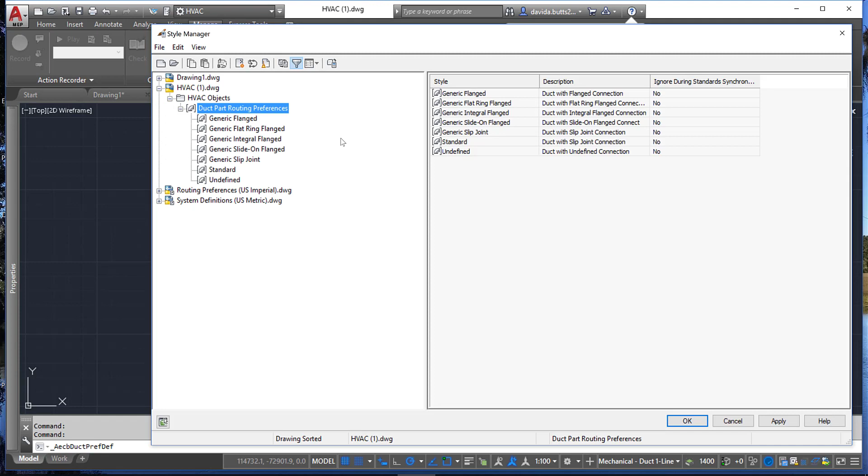If I go to Style Manager and I select this tool, I get these options: System Definitions and Routing Preferences. In order for you to draw any duct, you have to have routing preferences assigned. So if I want to use generic slip joint, if I go and look at what you have in your current drawing, you don't have any fittings assigned.

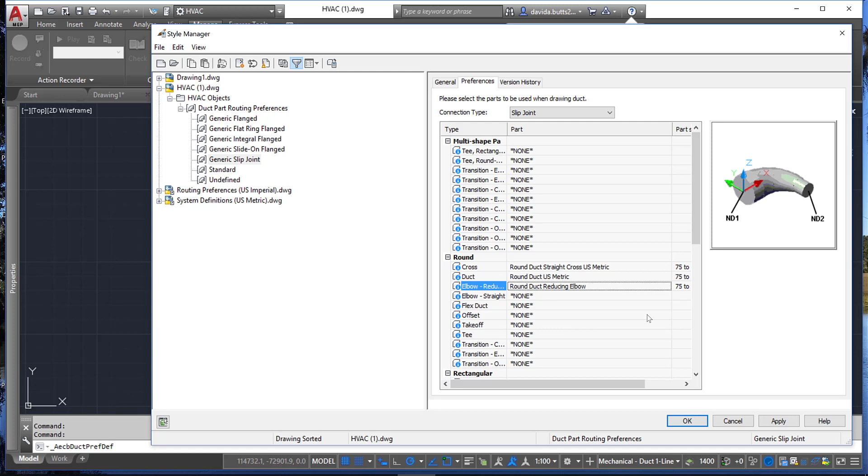So unless you go through and make these changes, like telling it what kind of a cross you want to use and what kind of a duct you're going to use, standard metric duct, and then you say what elbow you're going to use, you have to go through this step. If you don't do this, you're not going to get correct results. So I'm going to walk through all these and fix all these right here.

We're going to do a round duct, smooth radius, one diameter so it takes up a little less room. And then we're going to tell it what to use for flex. And again, you have to have this set. If you don't set any of this, you're not going to get routing to work correctly. We'll do a couple more things in here.

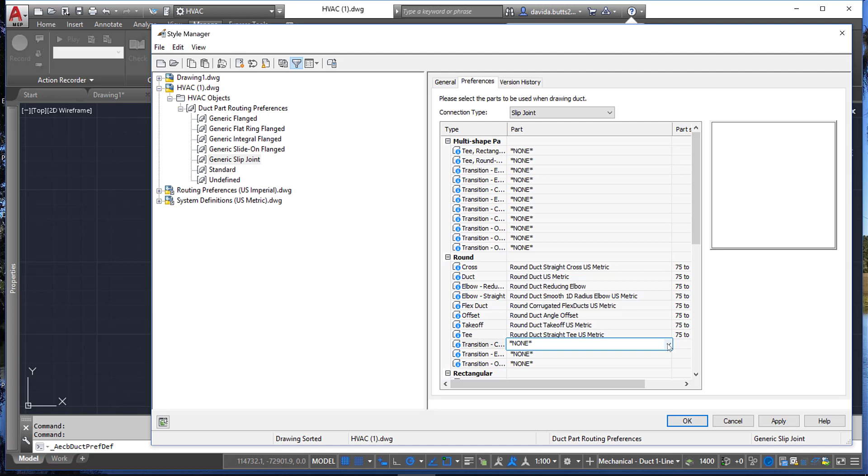And we'll do a little straight tee. And then we'll come over here and set you to use a round angled reducer. Do an eccentric reducer here. And one more transition with an offset. Okay, so we're just worried about drawing round duct at this point. Okay? So now what I'm going to do is click OK.

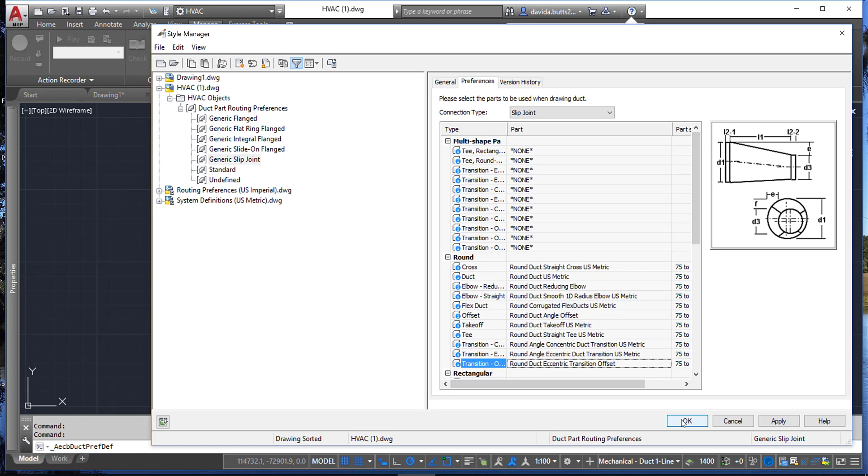Now, once I have that assigned, I can come back to the Style Manager and go to System Definitions. And I pick the system that I want to draw. Again, if you don't set this, your duct is not going to draw correctly. So I'm picking the slip joint now. Once that's assigned, then I can start drawing slip joint duct. I'm going to go ahead and click OK.

And one other note in here, you don't have to be in a single line view to draw this. In fact, I recommend that you don't work in a single line view. The best thing you can do is work in either MEP Design or MEP Basic 2-line. That way you can see the entire duct that you're modeling, because it doesn't matter. At any point you can come back and change the display back and forth between double line and single line, but work in double line so you can actually see what's going on.

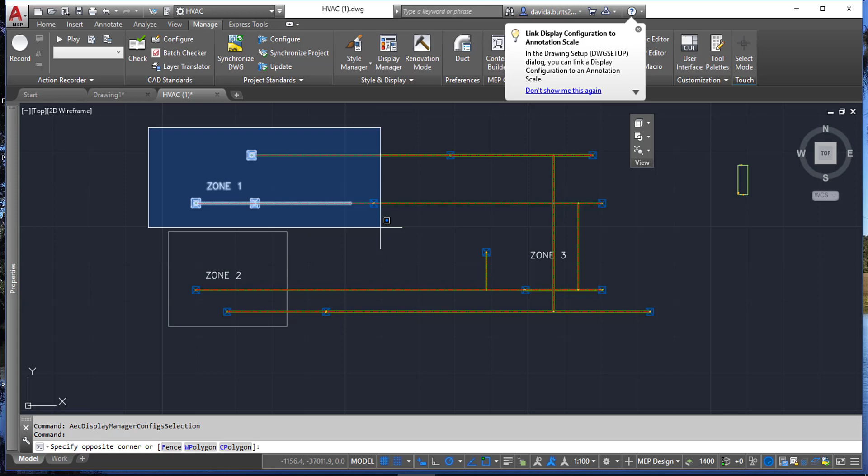Now I'm going to make a little change here. I'm going to go ahead and get rid of all the duct that you've drawn in your current drawing. I'm going to pick this and I'm going to go to Properties. And I'm going to say, okay, let's just look at the regular duct in this case. Actually, let's do this a better way. Let's pick this and just start deleting all these components that are just duct.

Get rid of that. We're going to keep these air terminals in here so you can see how this stuff is supposed to work. All right. Get rid of another set of vertical runs here because you don't need those. We're just going to drop out a bunch of sections here, get rid of that crazy looking flex that you had.

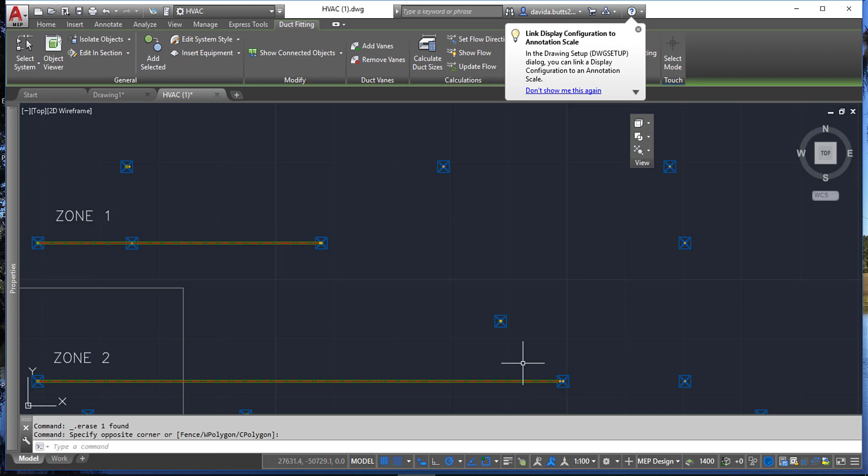All right, so once we get all this done, I'm going to make a couple of changes here real quick. The first thing you want to do is make sure you have everything at the same elevation. So if I'm connecting all this duct, what I want to do are these air terminals. I'm going to pick these. I'm going to come to Properties first. What you're looking for is to see what you need in here.

So I'm going to pick the multi-view part. That's what the air terminal is. What you're looking for is what elevation it is. So see how it says varies in here? That means that you have this stuff at different elevations. That's not going to happen in most projects. So you want to set them all to be the same elevation, like 4400.

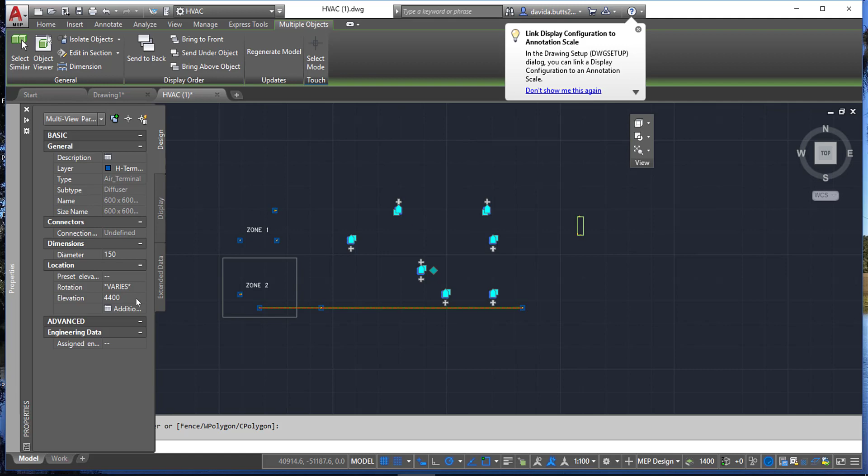Okay, that way everything is in here the way it needs to be, and you've got everything at the elevation that it can properly be assigned to. So if we take a look at this in 3D model to see where the stuff's not connected, you can see that we've got all these air terminals now that are at the same elevation and the same height.

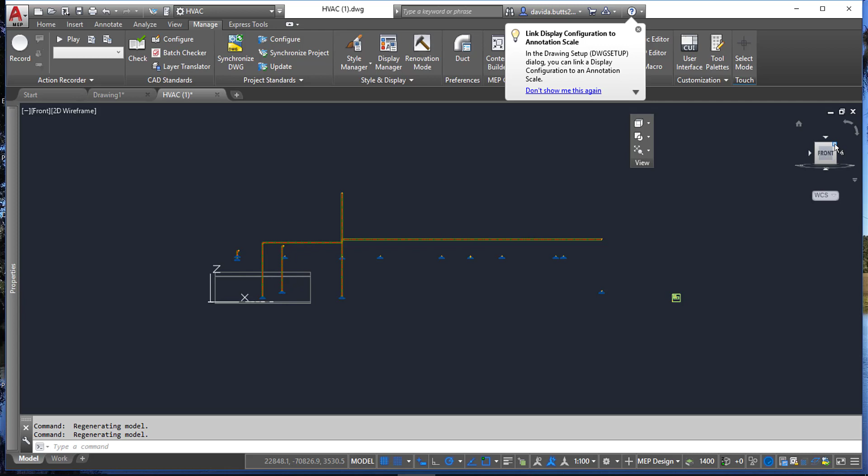This is what you really want to be looking for when you're looking at this to get ready to start routing duct. So again, take advantage of this view cube, spin around your view, and make sure that you've got the duct and fittings and stuff that you need in the drawing. All right, so let's go back over here to a top view again. Oops, sorry. Kind of rotated on me there. Let's go home. That's always the best thing to do. Come back to our top view.

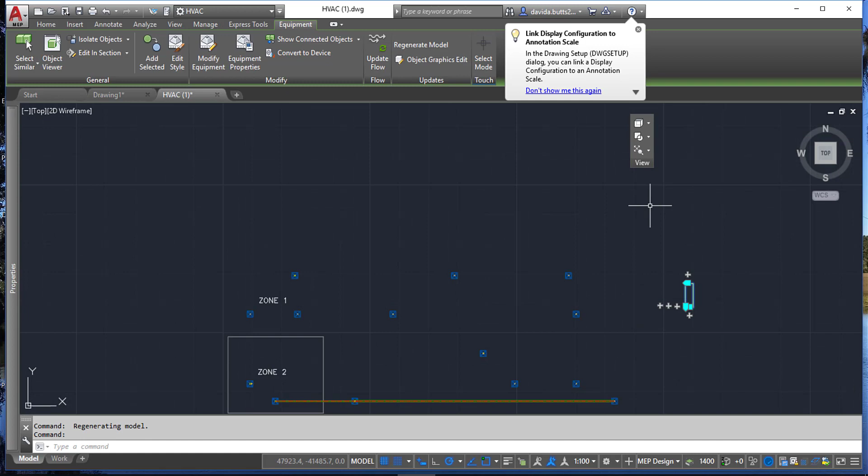All right, so you've got over here, you have a piece of equipment that's your source. This is what's providing the air to it. So in this particular case, this is an air handling unit, all right? And normally you'd want to draw the duct to this, but that's all right. We're not going to do that right now. What we're going to do is simply draw some duct out here. So I'm going to start by drawing a main duct.

So I go to Home, Duct, I pick the command, and I come over here to Properties. So the first thing I want to do is check the system that I'm working with. If you don't set this, you're not going to get the right duct routing. So I'm going to pick SA for supply air. Then I'm going to look at my routing preference. Notice that it picked up generic slip joint because that's the one we had assigned to the system definition. So again, you got to check these two settings here to make sure it routes correctly.

Now we know the air terminals are at 4,400. So what I want to do is set an elevation above it, just like you did before. And I'm going to set this up at, let's say, 5,800, just to give it some serious elevation in here. Then I'm going to come and I'm going to check the size of the terminal that I'm working with. So I can set the width and the height. In this case, I don't want to do generic. I actually want to do round. So I want to make sure that I'm using that slip joint.

So I'm going to start with a heavier diameter. And here's a piece of advice. Pick from the list here so you're getting something that's correct. So I'm going to go ahead and I'm going to pick 300 for the main duct in here. And I'm just going to draw this duct straight down the line here, okay? Like I would be running a main, and you can make turns and everything else and get it set to where you need to be. So the first thing you're noticing, notice how mine is blue. And the reason is because I actually picked the system definition and properties to get it to work.

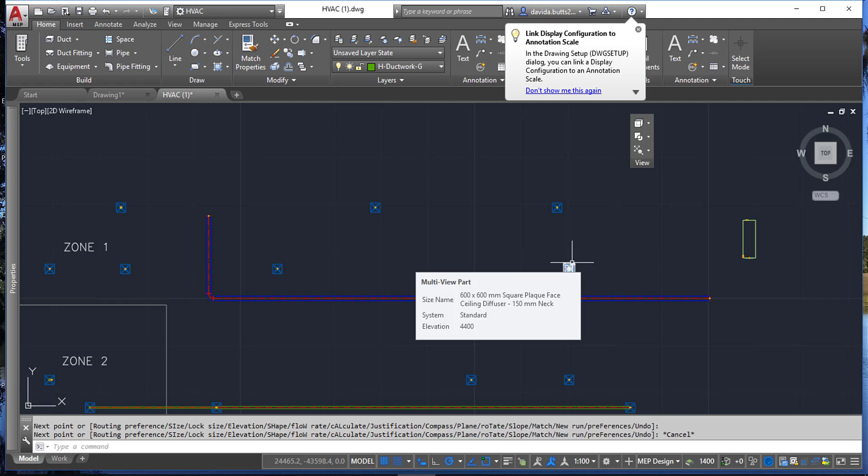Now, if I want to make a connection to an air terminal, what I do is I'll pick the air terminal first, and let's take a look at its properties. And you can see the connection right now is 150. So that's the size of the round duct that you're going to put to this. So I have a couple options in here. I can come over here and I can pick this little plus sign grip, and then I can pick add duct if I want to. So if I pick that, it automatically kicks me to a duct command.

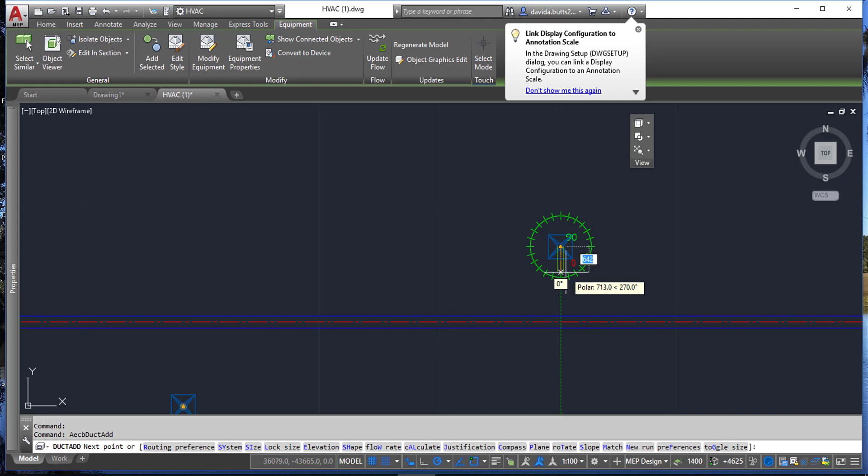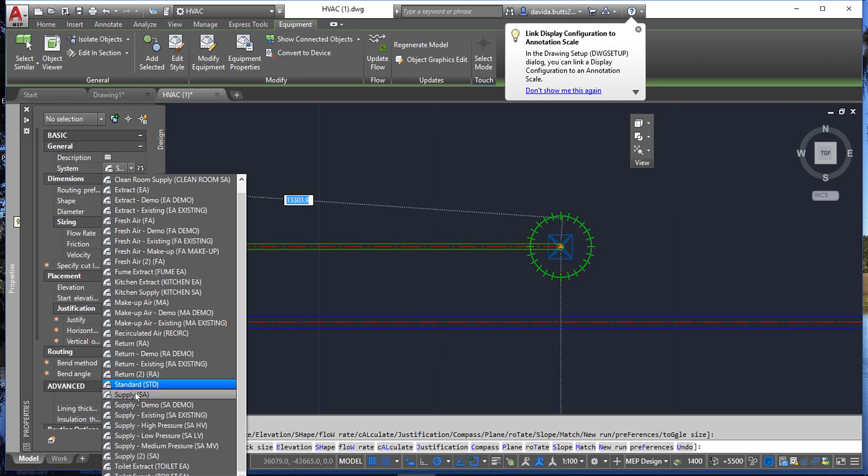Now where this really gets smart is I can come up and change the elevation here. So see how it's at 4625? So I'm going to go ahead and change the elevation to 5500, and that's going to put in a vertical rise. Then all I have to do, and again, you want to check your systems and make sure everything's right. We're on standard system, so let's go back and make sure we're doing supply air. Okay, and now that we have that, we want to come over here and we want to just snap to the side of the duct in here. Just use that node snap to make sure that everything connects correctly.

And give you a piece of advice: I would turn ortho on when you do this if you're trying to draw straight duct. So once we make that connection, we use the connector to create it. It's going to ask us, hey, what kind of a reducer and connection do you want to have? So you can tell it what piece you want to use, a 300 by 150 millimeter slip joint angle.

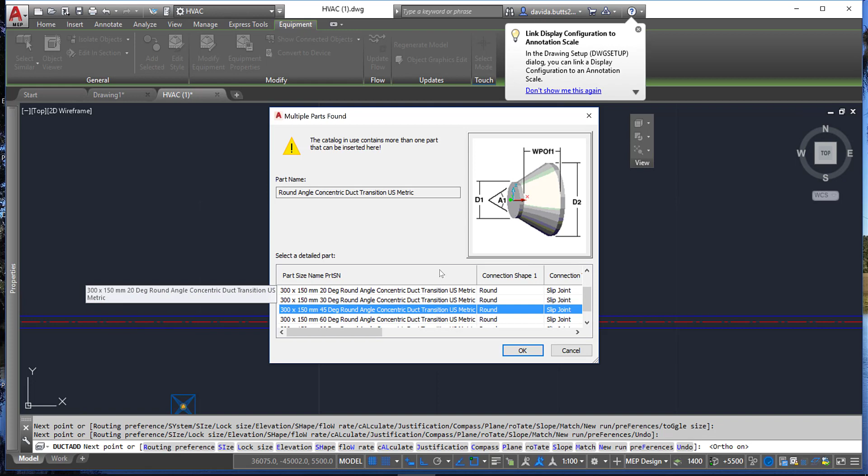So you can use any angle that's in here, like a 45-degree round. Go ahead and click OK. You'll notice that that puts the tap and the connection in the joint. Now you can also set this up to use T's. You can use either one that you want. So again, it's the same step.

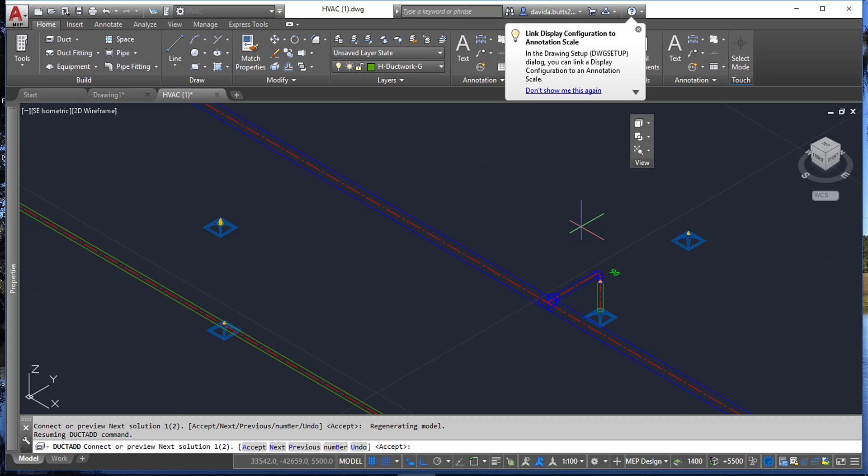Once I get that first one defined, I come over here and I look at it in 3D model and see how everything routes all nice and neat to that piece. That's what you're trying to do. Now, if I was going to connect to this air terminal over here, let's take a look at another way to do this. I'm going to go back to my top view, and I'm going to come over here and start the duct command. I'll show you a way to cheat.

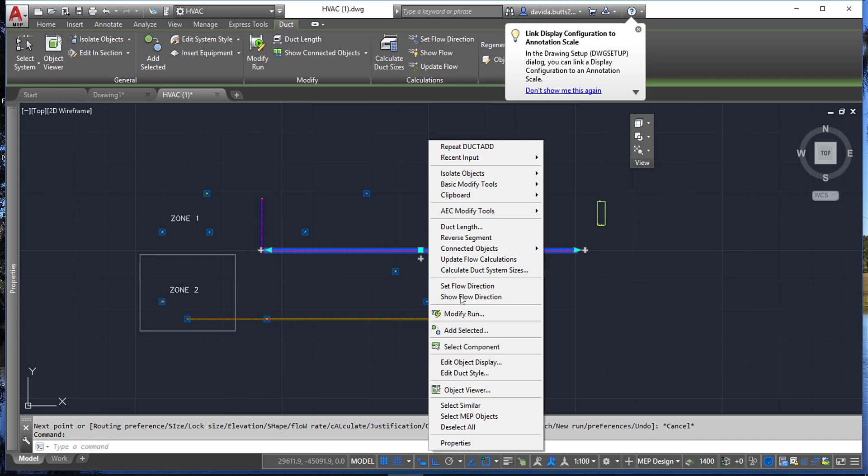I'm actually going to, whoops, we screwed that up. That's okay. I'm going to pick this, right click, and say add selected. And what that does is it sets the properties to match everything exactly for what I selected. So there's our supply system and our generic duct in here. So now we're at 300. I can change the size here and go to like 150.

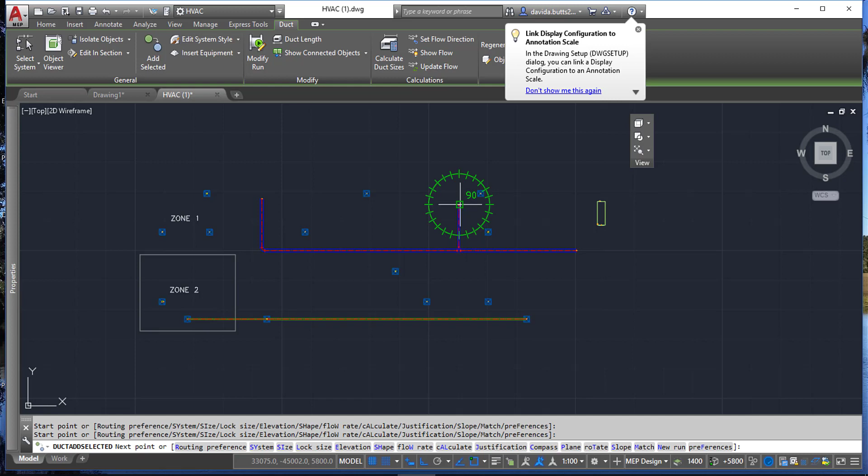So once I do that, I start my connection here, and I come out here and I draw a straight leg out a specific distance. Okay, and then I stop. So all I'm trying to do is put this main run in here. I'm going to hit escape, and I'm going to finish that command.

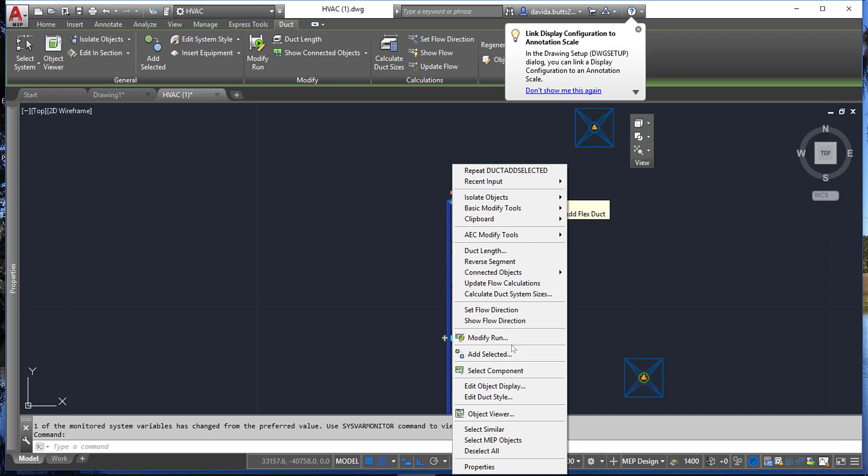So if I want to draw the flex duct from this point to that point, all I have to do is pick the duct, and I can right click on this and tell it what I want it to do. Do I want it to change the run? Do I want to change the elevation? What do I want to change with this? I can also tell it that I want to add flex duct, so I get options for that. So you can also do this from the top up here, and instead of just picking duct, I can come up here and say, give me flex duct.

So now what I'm going to do is I'm going to snap to that end. I'm going to turn my ortho off. I'm going to draw a short little segment here. And then I'm going to come over and I'm going to snap. Again, you want to be careful. You want to use that duct end connector to create that connection there. And notice how that does the flex duct all the way down to that component.

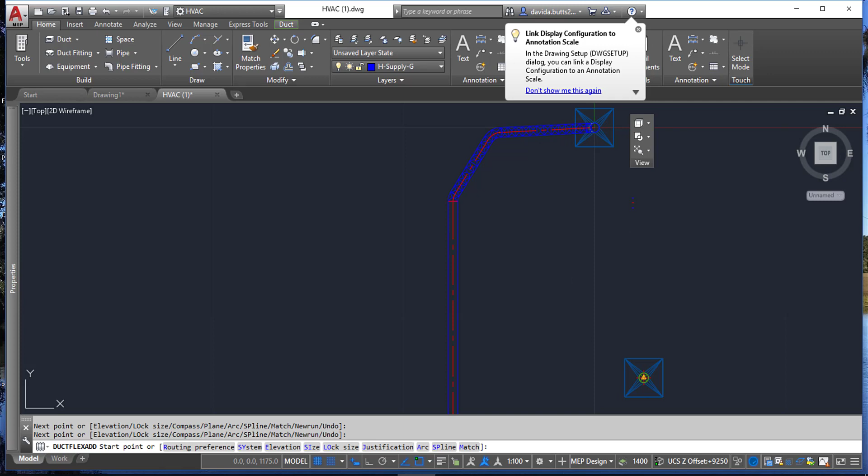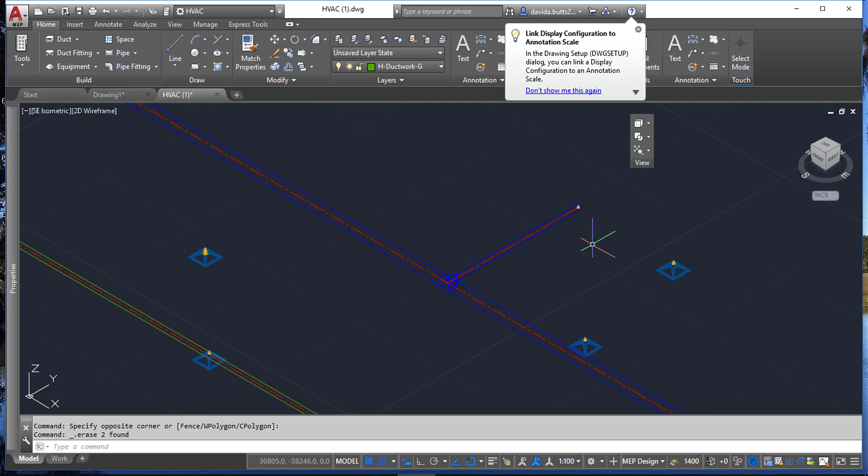So if I come back here and I look at this in a 3D view, notice how nothing is changing elevation. It's going exactly where I had it set to be. And I can also pick these parts after they're done, and I can change their orientation, I can change their location. You can rearrange all this stuff as you need to. Okay, let me undo that. We'll get rid of this little vertical riser here.

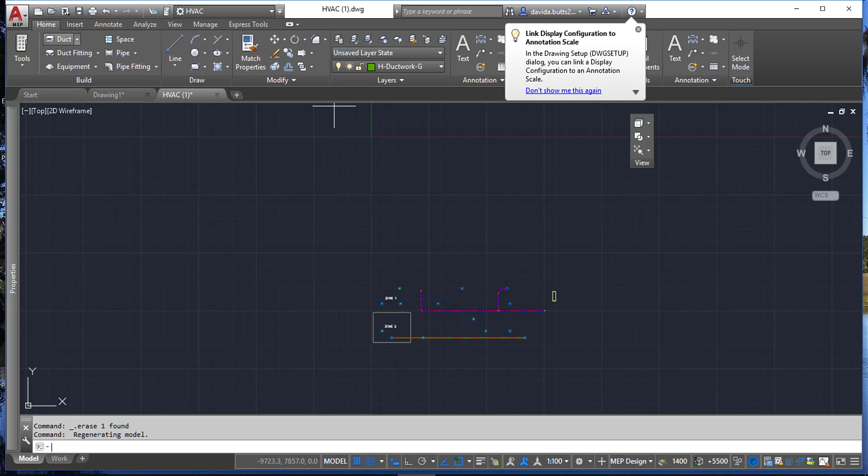So again, the steps here are to understand the right process for putting this stuff together. You don't have to be in a single line view or a double line view. When you're drawing the duct, start off by drawing the duct and making sure you're checking your properties. So come back here to duct, and I go to properties, and I'm looking for this system. Make sure it's set to what you want it to be, supply.

Check the routing preference. Check the shape and the diameter. Check the elevation. You have to look at all these. If you don't look at them, you're not going to be able to route duct correctly. Now, if you look down here a little bit further, there's a couple other option settings you have when you start to route. One is what the bend method is. Do you want to use an elbow, or do you want to use an offset or a transition? I'm just going to use a standard set of elbows now.

So that's one way that you can adjust routing. There's a couple other things you can do down here. If I look at the branch fittings, I can come down here and say, what do I want it to use? Do I want it to use a T or a takeoff? So again, I'm doing all this while I'm routing the duct. And I can tell it what the terminal to duct connection is.

So here's that elbow with rigid duct. That's the default. But if I want it to automatically connect flex, I just simply pick flex. Then I can come back here and look at fitting settings. And this is going to open that same dialog for the routing preferences. So you notice this is where we set all the round stuff before.

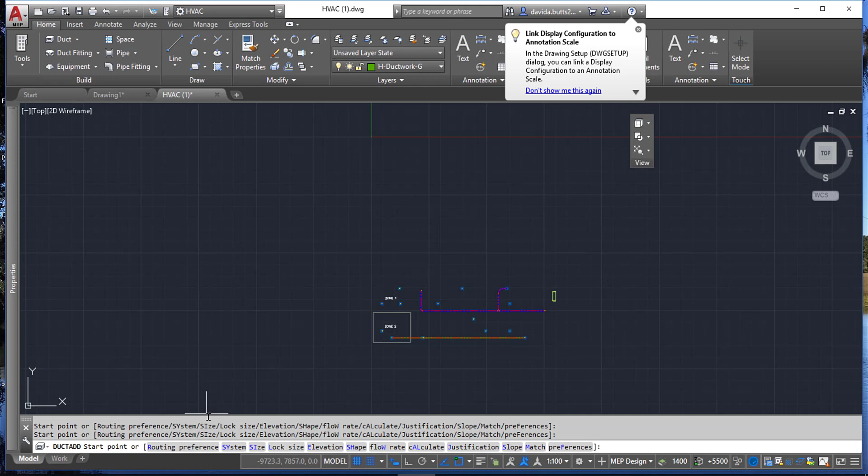Okay? And I get a couple more options on the command line I can pick from, or I can just come back here to properties and I can take a look at it. And then I have my preferences in here. And so my preferences tell me what to do with my elbow layout. What angle am I going to use for slope? And am I going to automatically create a riser at a new elevation? And the answer is always going to be yes in that case, unless you're doing slope duct.

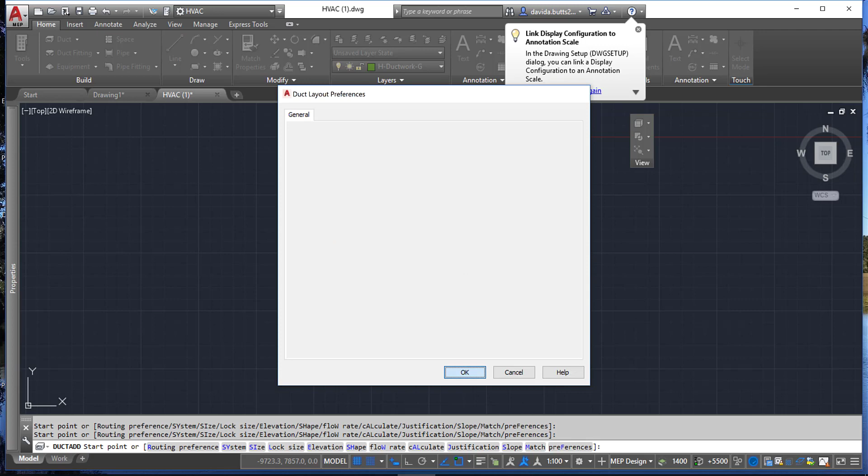So here's what we're going to do. I'm going to go ahead and click OK. And now to draw another duct, I'm going to go ahead and pick the size of this duct. Okay. Let's go back and check our properties. Again, I want to make sure that it's at the right elevation. Yep, it's 5800. There's that size, 150.

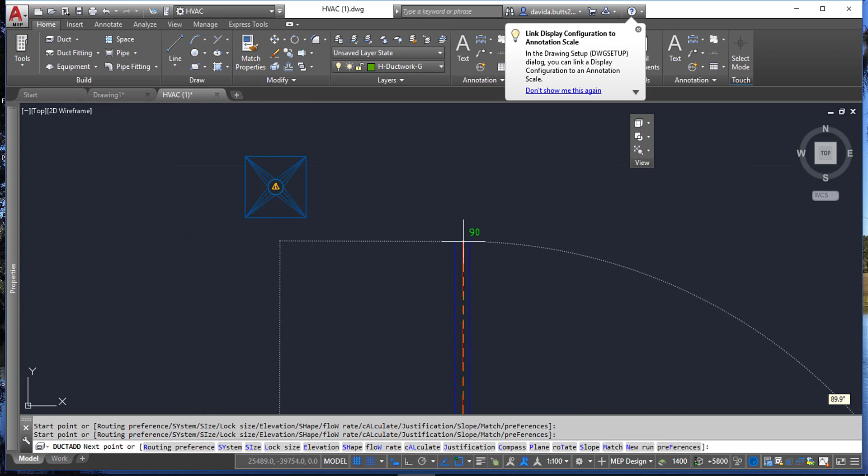So if you remember, we just told it that our terminal to duct connection is going to be flex. So I'm going to scroll up here and I'm going to pick a point. And then when I come over here and I snap to this, and again, make sure you use the duct connector, I pick that. Notice how it automatically put flex in there. So I can go ahead and accept it, and now I've got that piece placed.

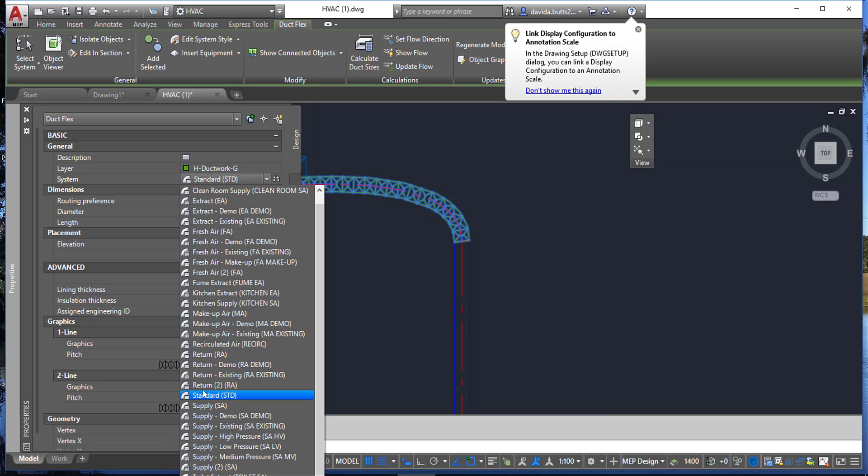And again, if the system's not right or anything's wrong with it, you can always pick this component, check its properties, and make sure that it's in the right system. Okay, make sure it's in supply air. And you can also check the fittings to make sure that everything is correct. So that's a real quick way of how ductwork and connecting to terminals works inside of AutoCAD MEP.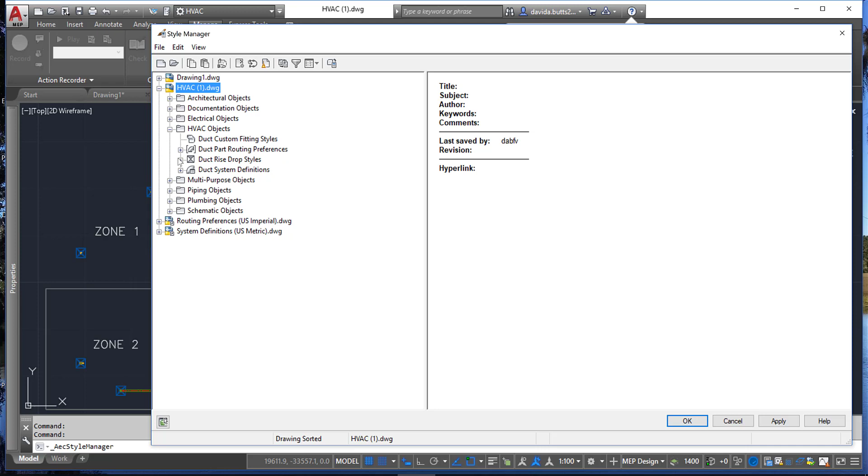Biggest pieces of advice I can give you is always check those settings. Always check and look at properties as well when you start the route. You want to make sure that you're looking at all these features before you start drawing something. You also want to, when you start the drawing, be here on Manage, and you can look at both routing preference and system definitions at the same time by clicking on the Style Manager and looking under HVAC objects. Then I can look here at my duct system definitions and make sure that the one that I'm using has its routing preference assigned.

And if you don't assign this, your duct is not going to route correctly. You're going to get the kind of problems that you're having with your current drawing. You can also make sure that you've got things at the same elevation. Make sure you know what elevation you're working at. That's critical to make sure that you know where everything is vertically in the model.

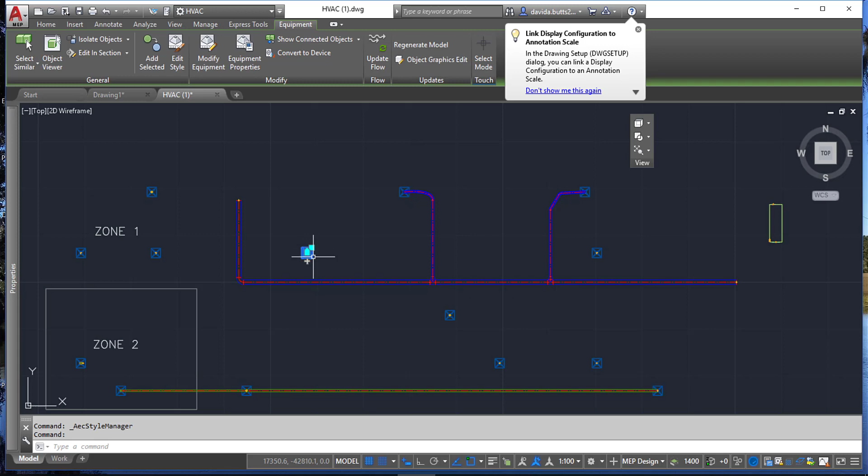And then at any time, you can go ahead and pick this, tell it to add another duct, come straight back up to this guy again. And when you do that, it's actually smart enough to go ahead and put the riser in there for you. And you can look at the solutions down on the bottom and say, hey, I like that solution, so I'm going to accept it. And then I'm going to hit enter to get out of the command.

Make sure you're checking your systems here. Make sure you're checking all this before you draw. And even if you screw up, it's okay. You can always come back and change the system and the routing preference after you get finished. So hopefully this is a good little 15-minute demo to give you an understanding of the concepts of working with duct in AutoCAD MEP. Thanks.